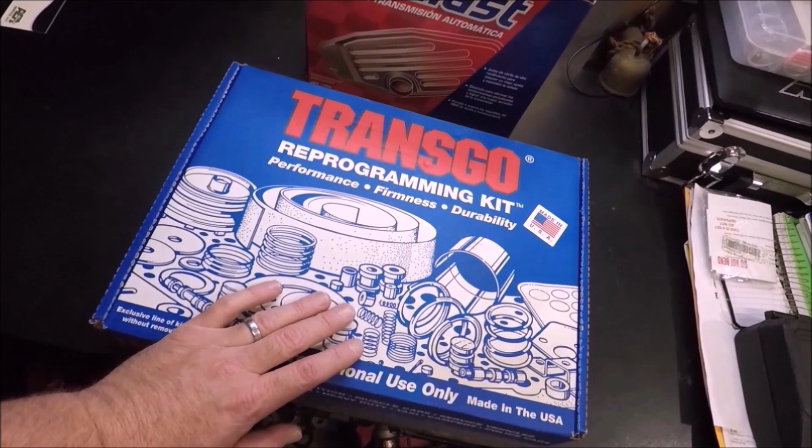The main thing we're going for here is we're trying to get rid of that sloppy shift that's costing us probably a half a second on our ETs. So that being said, we're going to open the box. So first up, we got our instructions here, page by page. I'm going to talk to you about that in just a minute. A cork gasket, which we're most likely not going to use. Then we have all our parts here.

Now, parts that apply to different sections of the transmission are in their own bags. I kind of like the way Transgo did that. They didn't just throw everything together in one bag. So if there's something you don't want to do, for instance, I believe this is the manual valve, where it gives you full manual control, you don't have to do that. You can just leave that stuff in the bag. These are the parts for your servo on the side of the transmission. That's one issue we're actually going to have.

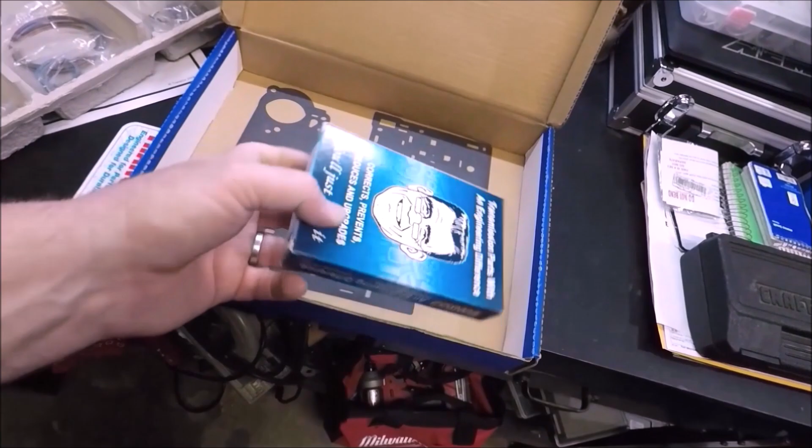If you lift this out, got your nice little Transgo sticker here, valve body gaskets, and you have your clutch spring kit. Now, in order to install this, you actually have to take the transmission apart. Since we are not removing the transmission from the vehicle, we are not going to be able to install these. Not a big deal. This is actually an optional piece.

With that being said, in my case, we have another issue, and that is the servo on the side of the transmission. Guys, I have been under the car. I'm going to get a better look at it once I get under there. But from what I'm seeing and from everything I have read online, it is pretty much impossible to get the servo out of the side of this C5 to install the shims and this helper spring in the servo without either removing the transmission from the vehicle or at bare minimum dropping the rear end to allow the transmission to come down enough to be able to pull this out the side.

So it seems to be pretty common practice in the C5 world to leave this part out for now. Now, I do want to say, for those of you who don't know, in the C5 Corvette, the transmission is mounted in the rear. So if you didn't know that, you may be thinking, hey man, why don't you just lower the cross member, drop the back of the transmission, get that servo out. It is not that easy in a C5, guys.

You actually have to take the whole rear cradle, the rear end, everything has to drop to get the transmission in and out. You have to deal with the torque tube that runs all the way to the front of the car. It is a pain in the rear, and that's why I'm choosing to not do anything to the servo on the side of the transmission until a later date when we have to take the transmission out of the car anyway.

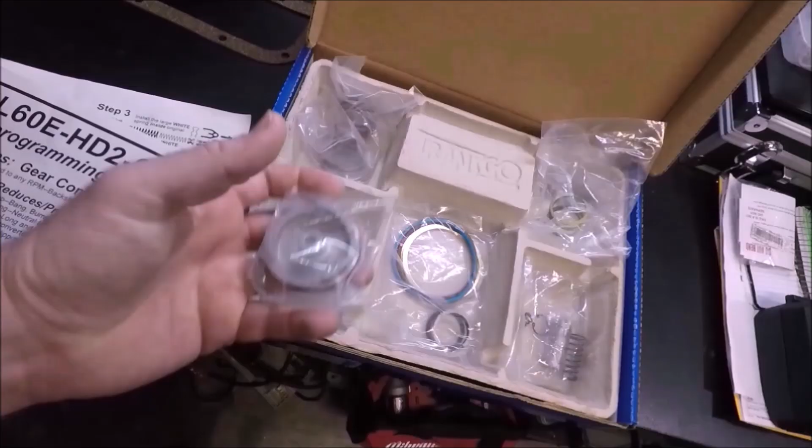At that point, we'll probably do a lot more than that, because while the transmission's out, it really doesn't make any sense to me not to upgrade some other internal parts such as the sun shell and maybe a few other things. So one other thing that I did buy is this accumulator piston online. I bought an aluminum one. I know some of these transmissions use a plastic accumulator piston, so they recommend when you're doing this kit that you go ahead and upgrade to the aluminum.

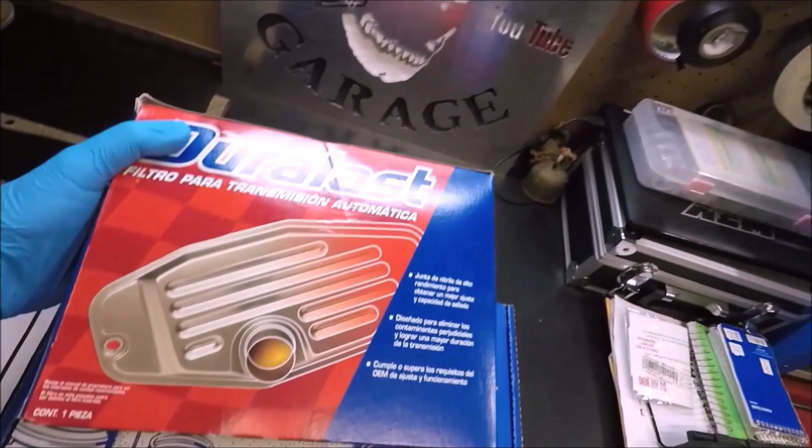One last thing before we drain the transmission fluid, I do want to make a note of this before we even start the video. I got this filter. They had this filter listed for the C5 Corvette. This filter to me looks like the deep pan 4L60 filter, and I do not think it's going to work with the C5 transmission pan. We'll find out. If it does not work, we will address that later in the video.

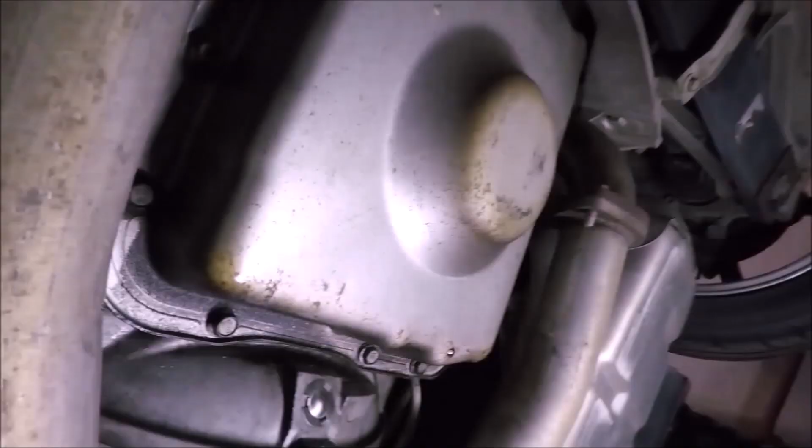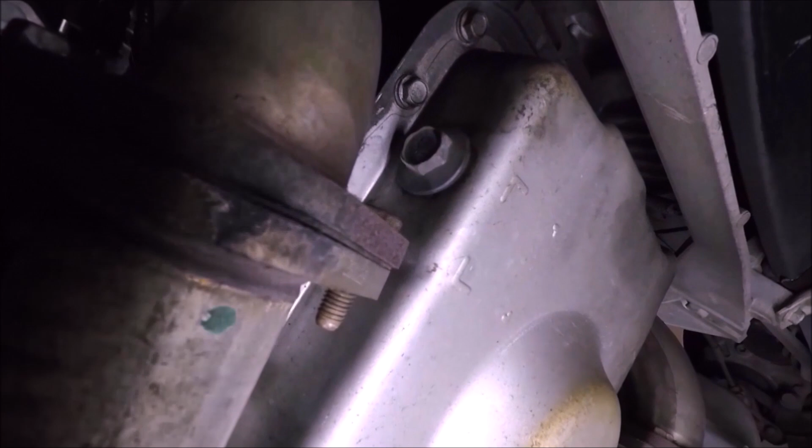We are under the car, and there are actually two different procedures I want to address as far as draining the oil. Now, if you are working on a C5 like I am, then over here on the driver's side, the back of the pan, you will find a drain plug. This is not just a drain plug, guys. This is a drain and fill plug. This is the only way you have to get transmission fluid in or out of the transmission on a C5. There's no dipstick. I will go over the fill procedure later, but for now, the drain procedure is we put a drain pan under it and we pull this plug.

If the vehicle you're working on does not have a drain plug, such as most trucks, you're going to have to go around and loosen the bolts either at the front or the back of the pan. Get a very large drain pan to cover a large surface area, or you will make a mess. And once you get all the bolts out except for maybe the back row, you're going to start loosening that back row. Pry the front of the pan loose, or you can choose to loosen the front row, pry the back of the pan loose, and you're going to have to let the pan drain a little bit that way.

Once it drains down enough to where you think you can handle the pan without dumping transmission fluid all over yourself, then you're going to hold the pan while you take the last remaining bolts out, and you're going to slowly lower the pan down. Now, again, I don't have to deal with that because we have a drain plug. So I'm going to get that taken loose, let all the fluid drain out.

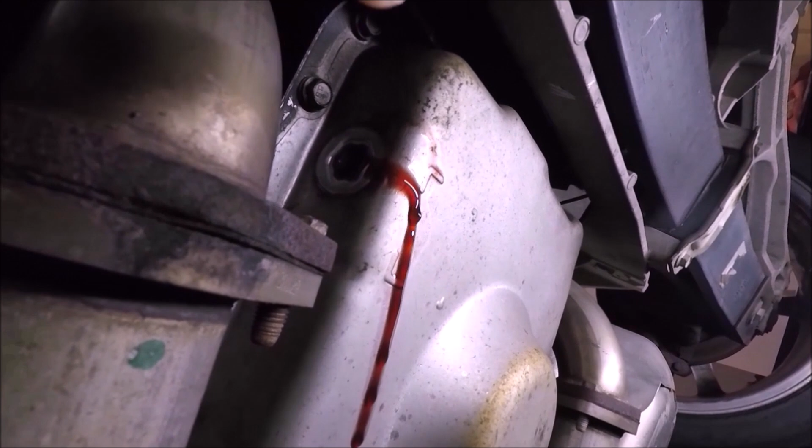So the fluid is almost finished draining. So the next thing I'm going to do, I'm going to put the plug back in to stop the drain. And I'm going to take loose 16 13 millimeter bolts around the outside of the pan and drop it. And I'm a cheater, so I'm going to use Mr. Milwaukee. All right, down to one bolt. I'm going to take that bolt loose and hold tension on the pan and lower it down as I take the bolt out.

Now, just a word of advice, make sure you leave your drain pan underneath the transmission. Guys, this thing could literally drip for like 4 days and would still be dripping. Just take my word for it. When you think it's done dripping, it's not done dripping. If you wipe it off, it's still not done dripping. So just leave your pan under here,

and we're going to take our pan off the bottom of the transmission. We're going to set it right here, and as we start taking parts off, we're just going to set them in the pan for now. That'll give us a convenient way to carry them over to the workbench later.

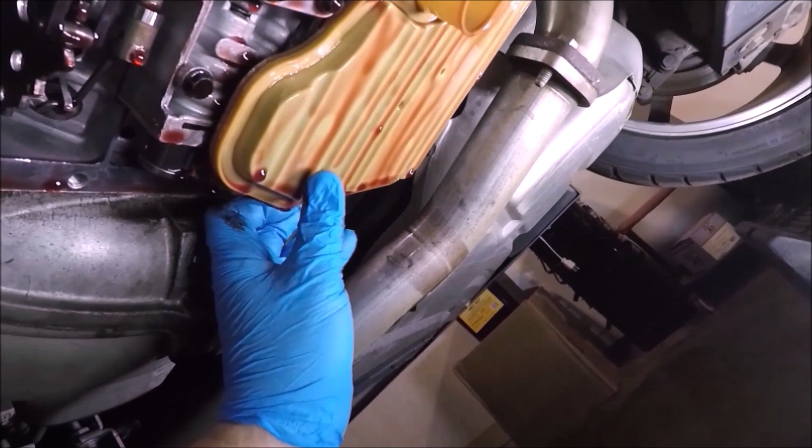So I'm just going to start with the transmission filter. We're just going to kind of pull down on it towards the front of the transmission. A little side-to-side movement as you pull down, and it should pop free. Go ahead and drain it into our drain pan here. And we'll go ahead and set it in the transmission pan.

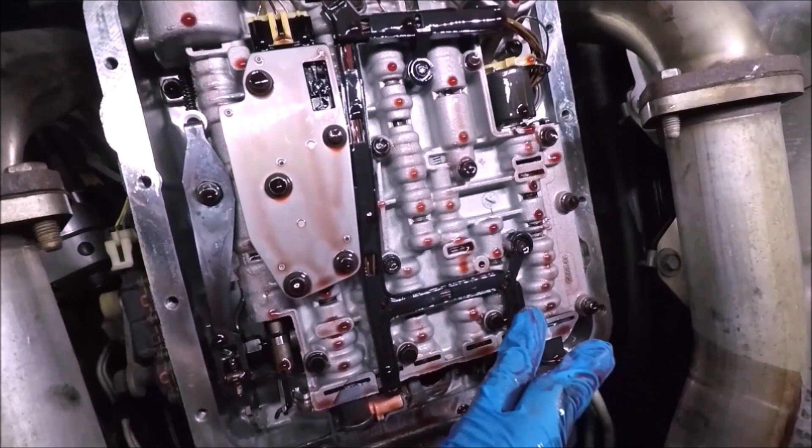The next thing I'm going to recommend doing is taking your cell phone and taking a picture of where everything plugs in here, guys. Just in case you get kind of confused later, you can just come over here, take your cell phone, take a picture, good to go for later. You'll be able to refer back to that picture because we're fixing to unplug all these electrical connectors.

So after you've taken your picture, you want to start unplugging your connectors. Be very careful, guys. Some of these connectors could be brittle and they will break. If they break, you're going to have no choice but to replace the entire harness. But just go ahead, go through here, unplug all these electrical connectors. Then we're going to pull this little pin out that retains this solenoid. Try not to have it go flying across the room.

We're going to pull this solenoid out to give us access to the two bolts that are holding in the TCC solenoid. We're going to take the two bolts loose from the TCC solenoid with a 10mm socket, wiggle it out while pulling down.

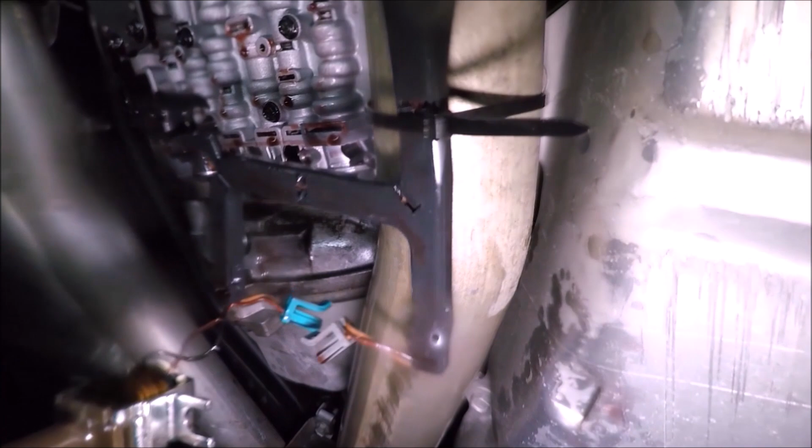You're going to pop the harness loose from all its attachment points and drape it over to the side out of your way. At that point, you're going to want to move your drain pan over underneath this to keep it from dripping everywhere. Now in my case, no matter where I let it dangle, it was still going to be in my way when I start removing the valve body. So I just went ahead and zip tied it to the exhaust over here.

Now the next thing I'm going to do, using the 10mm again, I'm going to remove these 3 bolts here and lower down the second accumulator. There are a series of springs and pistons behind here, so you want to be careful as you're lowering this down, you don't drop any of that into the transmission fluid.

Remember what I said the other day about how I do all the work, the filming, the editing, all by myself? Well, yeah, sometimes it's a pain in the butt, guys.

But you can look in here and you can see the second accumulator piston, and it looks like it is in fact plastic, so I'm glad I bought that replacement. We're just going to take this guy, set it in the transmission pan with all our other goodies. And the next thing I'm going to do is remove these 3 10mm bolts and these 2 8mm bolts and drop this pressure manifold. And we're going to put them in the pan.

Now we're going to take out the 13mm bolt for our shift detent spring, remove that, and we're going to remove all the 10mm screws from the valve body except this one right in the middle. We're going to leave that in there to hold it up. I'm now going to remove these 3 8mm screws here. Once I do that, I'm going to hold on to this while I remove this center bolt and lower the

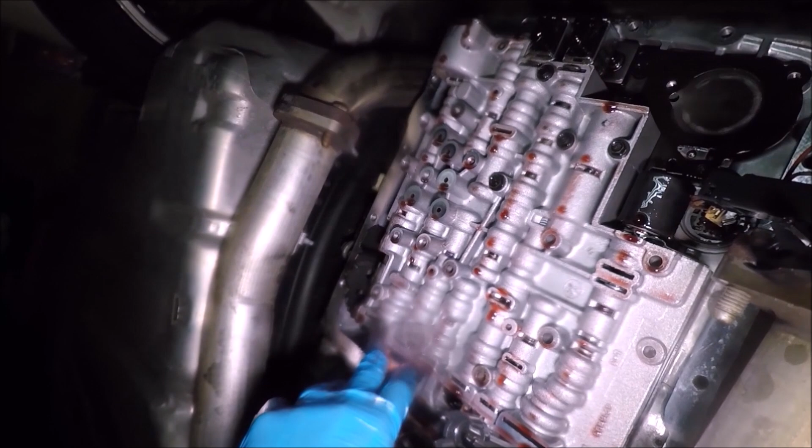whole valve body down. Now I would love to do one of those cool little videos where I show myself slowly lowering it down in a dramatic fashion, but like I said, guys, I'm out here all by myself. So I'm just telling you what I'm going to do. I'm going to have to do it off camera because, well, quite frankly, I don't have 3 hands.

What I can warn you about is upon loosening that middle screw ever so slightly, this thing started draining, dumping fluid everywhere. So be on the lookout for that, guys. As a matter of fact, I think I'm going to let this drain a few minutes and I'm going to go grab me something to drink.

I managed to get the valve body off. One little thing I wanted to let you guys know. Over here you have your shift linkage, guys. It goes to your manual shift valve, and it's kind of like a little Z shape. What you have to do is, once you start to lower the valve body, you have to bring it over toward the passenger side about 1 inch, and then this guy will slip right out of the manual valve, and you'll be able to lower the valve body down after that. And just like everything else, we just put it in the transmission pan here.

The only thing we have left is to take these 3 8mm bolts out to remove that plate. That is currently the only thing holding our separator plate up. Now keep in mind, guys, there is a check ball. Most of the check balls are in the valve body, but there is a check ball above this plate right up, oh, there it is, right here. So when you're lowering this down, you don't want to lose that guy. I'm going to get those 3 bolts out, set this in the pan along with the check ball that I'm not going to freaking lose, and then I'll take everything over to the bench and I'll see you guys then.

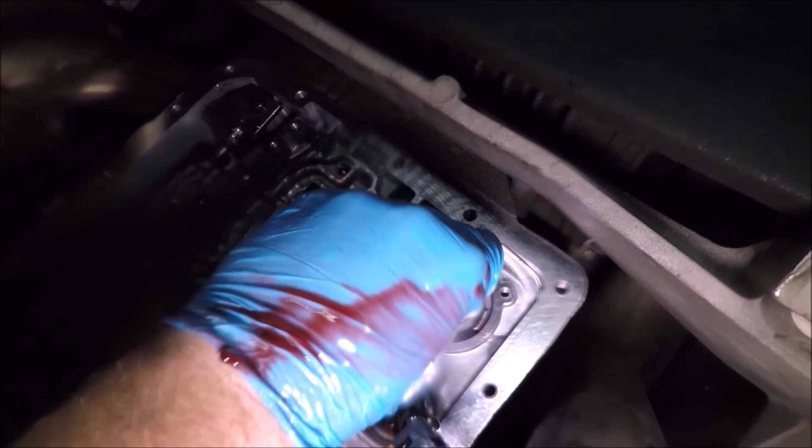Almost forgot. We've got this one last accumulator piston here that needs to come out, and it looks like it's going to make a mess, but we're going to take the pin that's through the center and we're just going to wiggle it. I'm going to use 2 hands for this, guys, but just keep wiggling. You can see it's coming down the bore, but we need to get that guy out of there. So I'm going to set the camera down, get that out of there, and then I will meet you guys at the bench. So here on the bench, we have all our goodies.

Now, I'm ashamed to say I'm going to have to take a few minutes to clean this GoPro because it got a bath in transmission fluid. Not good. But I do recommend cleaning off some of these parts with brake clean. You don't have to get real intricate with it unless you've got a lot of grit and grime. You can kind of tell I've got a thin layer of clutch materials, but nothing bad really. This transmission, judging from the pan and everything, looks like it's in pretty good shape.

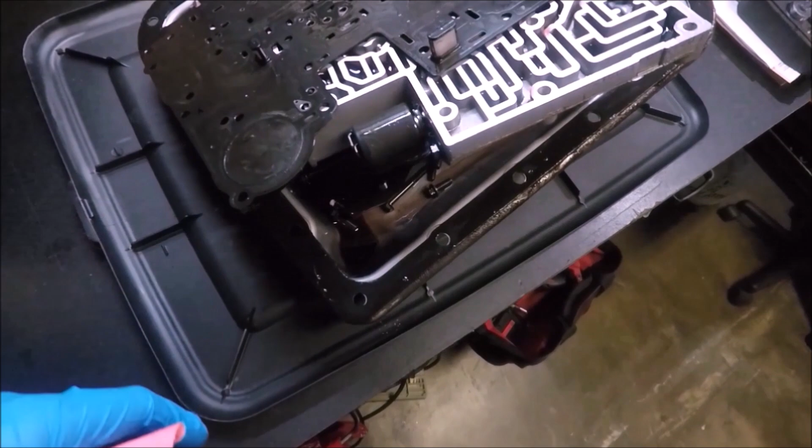So I'm basically just going to clean off my separator plate here, take my little filters out. We actually have a modification we have to do to this one. I'm just going to spray off the valve body a little bit to clean it up, clean up all my other little parts here, clean the pan up real good. And honestly, guys, I'm going to let the transmission drain overnight so that when I go to put this back together, I'm not getting fluid dripped all over, or at least not getting it dumped on me.

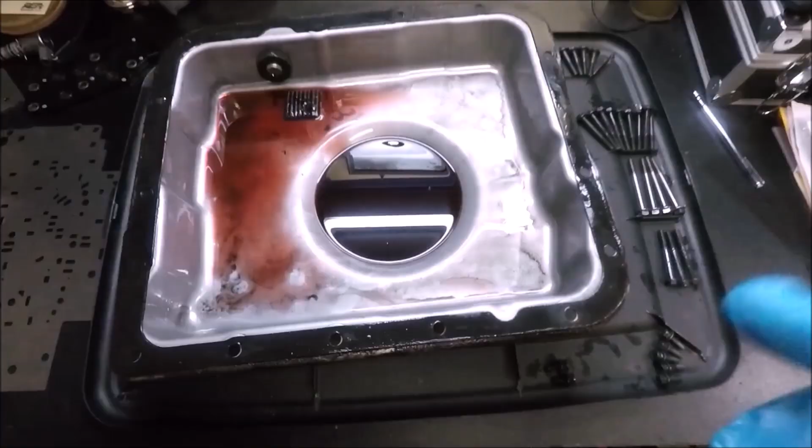Now, I was just organizing all my bolts here, just wiping them off. And I wanted to show you guys this before I actually dump this pan. There is very minimal clutch material. Of course, we have some around the magnet here, as you usually will, but overall, oh, sorry guys, that came off the magnet, for a transmission with 78,000 miles on it, and one that I personally have beat the crap out of, I think this thing's in pretty good shape. The fluid was even nice and red, so I think our transmission's in good shape, and we're good to go to put the shift kit in.

Alright guys, so here we are. All our parts are cleaned. We got everything kind of laid out here, ready to go. We got our pan all cleaned up, and we are going to start the modifications now. I'm going to go ahead, do everything that I can up here on the bench first, even though it might be slightly out of order from the instructions, and then we'll move under the car where you're probably not going to be able to see what the hell I'm doing because I don't have anybody to hold the camera. But I'm going to give it my best shot, guys.

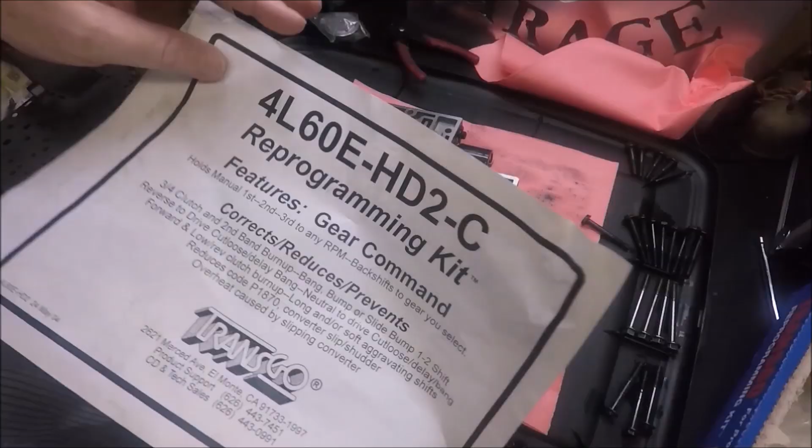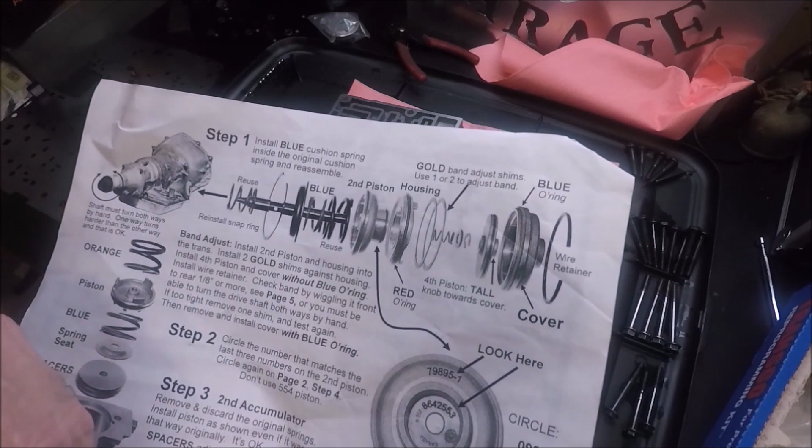So we go to page 1, and of course the first thing it tells you to do is the band adjustment with the servo on the side of the transmission here. Like I said earlier in the video, guys, I don't think I can get this out. So here's what I'm going to do. I'm going to skip that for now. For now, I'll just let you kind of see the instructions. Basically, all you're doing is pulling the servo out of the side of the transmission there.

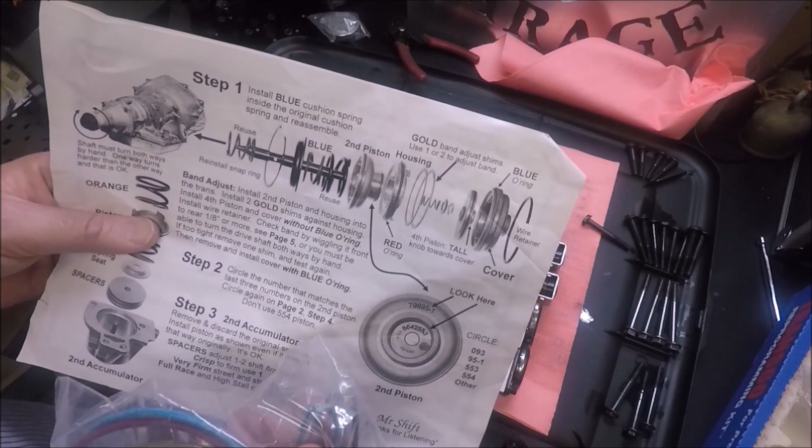And in this package, you've got this blue spring. It's going to go inside of the spring right here that's already in there. And then you've got these shims. You can add these shims here to adjust the band to either make it tighter or looser. Most people that I have read about say don't even use the shims. Most people, all they do is put this spring in, put it all back together. Again, guys, that's all there is to it. You're adding a spring. Most people leave out the shims, and the 2 O-rings are just gaskets to replace the O-ring gaskets that you already have.

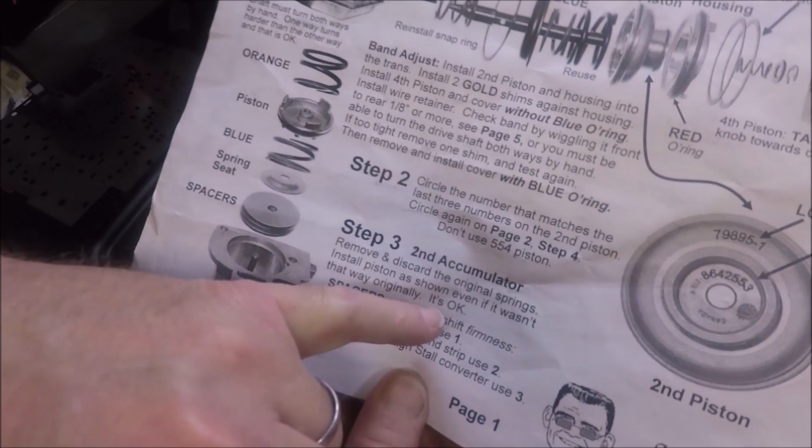So moving on, we have our second accumulator. That's this guy right here. What it says to do is remove and discard the original springs, install the piston as shown. Even if it wasn't installed that way originally, it's okay. And obviously mine is not installed that way originally. It's actually flipped upside down. And again, we're getting rid of the plastic one and replacing it with this metal one.

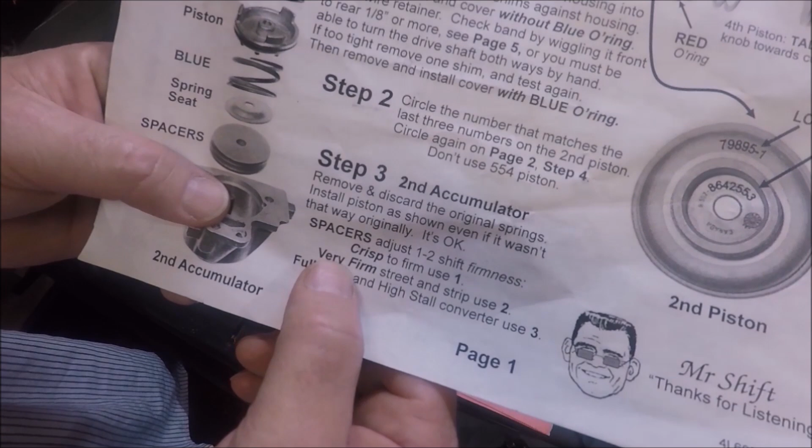When it comes to these spacers here, it says this is to adjust the 1-2 shift firmness. One spacer is supposed to be a crisp shift. 2 spacers is supposed to be very firm for street and strip, and 3 is full race with high stall converters. Here's the deal, guys. You're actually doing a lot of different things to adjust the feel of these shifts, okay? So later on, we're going to drill our separator plate. When we do that, basically, if you put in 3 spacers and open up the holes to full race, this thing's going to hit hard as hell.

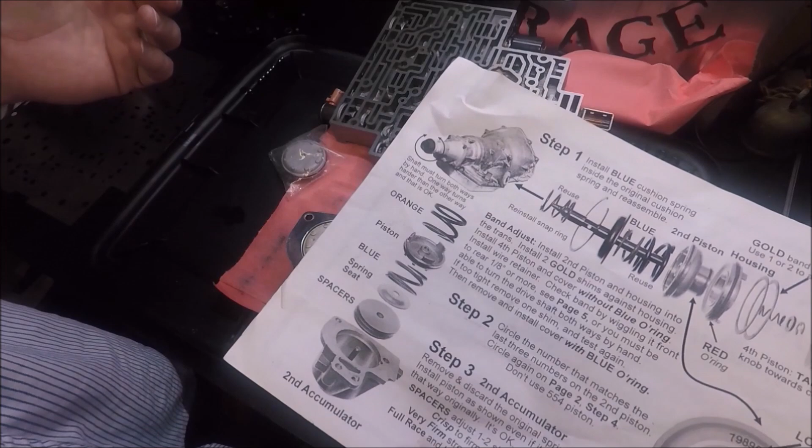I'm going to actually, when I do the holes, well, you'll see. But for now, I'm going to go with 1 spacer when I put this together. I'm hoping it won't be too harsh, but if it is, the truth is, guys, it's not a huge pain to drop this pan. You can actually take this off without removing the valve body and everything. So it really wouldn't be a big deal to have to drop the pan again if this is too firm of a shift and take that spacer out. So I'm going to start off with the spacer. I'm going to show you how I'm putting that together now according to these instructions.

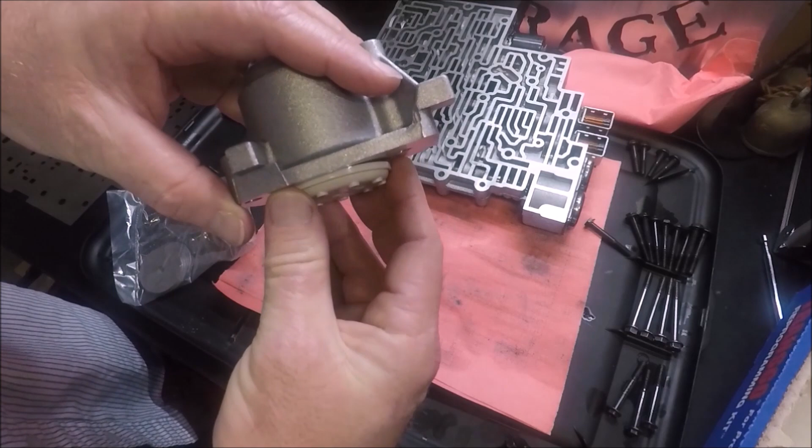So we're using this baggie. It's got the spacers, the spring seat, a red spring, and a blue spring. We're going to take our 1-2 accumulator. I'm getting rid of this. And it says to discard the old springs. According to the instructions, we're going to go with 1 spacer. Put our spring seat in with the beveled edge up. Then we've got our blue spring. Then we've got our new piston here, and originally it was like this, but according to the instructions, we're flipping it over and installing it like this.

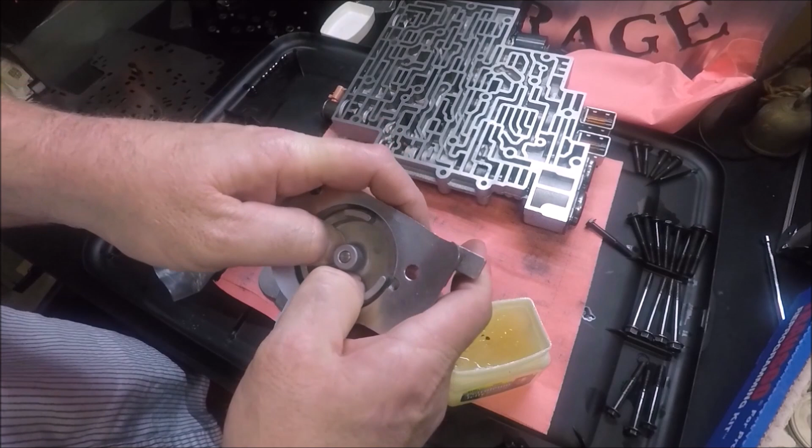Actually going to take some petroleum jelly, Vaseline, and smear it around this seal. I don't know if I'm going to edit it or not, but I actually just tried to put it in with no lubrication, and it didn't want to go in. So I'm going to lubricate the edge here, and then hopefully she's going to pop in. A little bit of pressure. There it goes. All right. So now we're popped in. Make sure it's not bound up. Yes, we're good. Take our red spring, put it right on top, and we're going to set this guy aside.

Now, moving right along. Oh, yes. Going over here to valve body. So we'll bring him over in the picture.

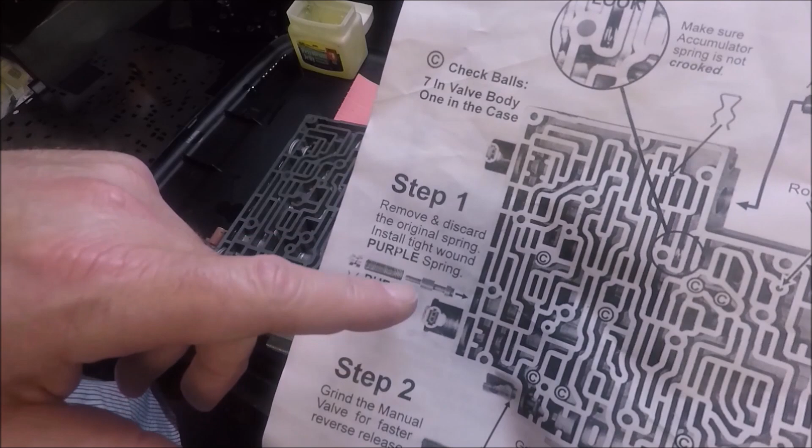And the first thing we're going to do, step 1, it says remove and discard the original spring. Install tight wound purple spring. Appears to be them. And here's our tight wound purple spring. Twist this solenoid up to get out of the way. And we've got a little spring clip here that we need to pull out.

And I don't know if this is going to pop out. It feels like it is spring loaded. So I'm just going to keep some tension on that with my thumb. And we're going to pull this little spring clip out here, and try to have it not go flying across the room. So there's a spring clip. I'm going to set it over here. I'm going to slowly let this guy come out.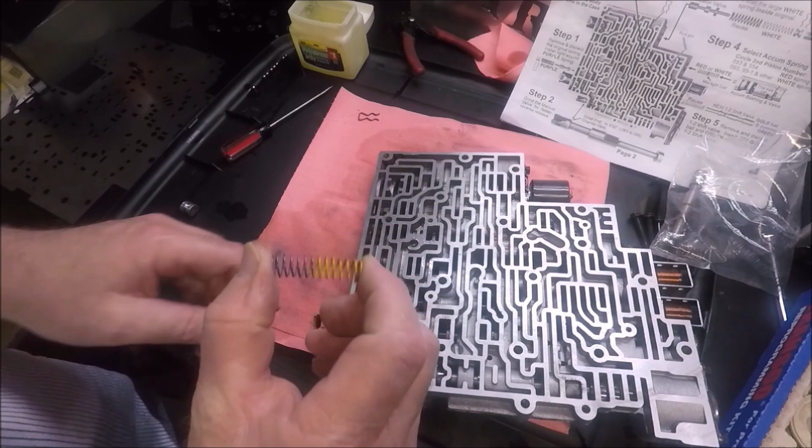And we can see this spring, which is obviously not wound anywhere near as tight as that one. So it came out like that. And then there is a valve in there. I'm just going to check to see that that valve moves freely, and it is. It's moving freely, guys. So there's really no need for me to remove that valve completely.

All I need to do is open my bag and get my purple spring out. We're just going to put our purple spring back down in here. We're going to put our plug back in the end, and we're going to put our clip back in.

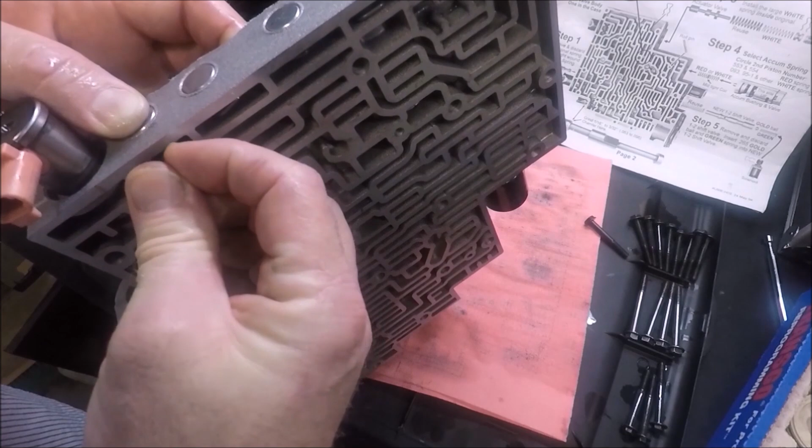Step 2, it says grind manual valve for faster reverse release. Totally not worried about that, guys. I would just skip this step. It's not a big deal, and I'm not going to do it. I don't care about the reverse release thing. But basically, all you're going to do, if you choose to do this step,

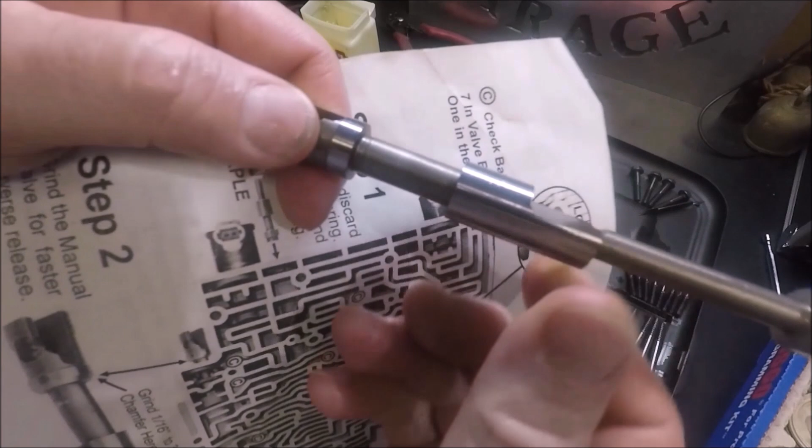you're going to take your manual valve here. You're going to take it over to a grinder, and you're just going to bevel this edge right here. You're just going to bevel this edge, knock the edge off, and as you can see here, bevel that edge all the way around. Like I said, I'm not worried about that. Totally not going to do that.

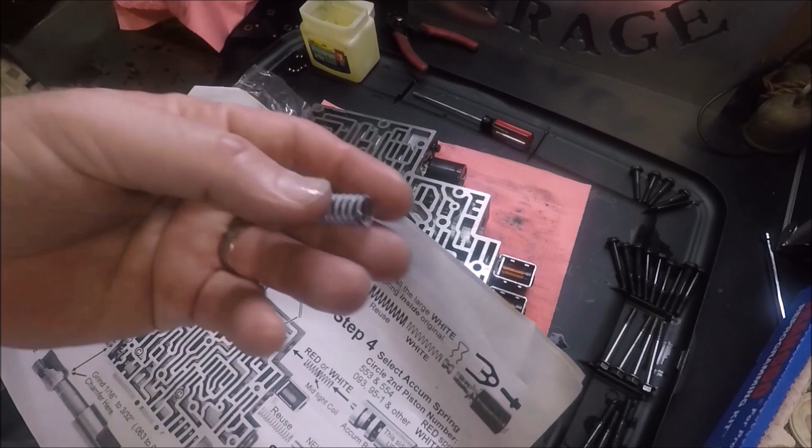Step 3 is we remove this solenoid, and all we're going to do is take our large white spring here. We're going to take our large white spring and we're going to put it inside of the spring that's already in there. I believe we're going to need an 8mm to pull this off.

Remove our little tension spring there. Going to carefully pull our solenoid out. So you're going to have another clip to deal with. This clip is pretty deep in here, guys, but if you flip the valve body over, you should be able to take a small screwdriver and you can push down on the clip, kind of work it out. At least that's what I'm going to try.

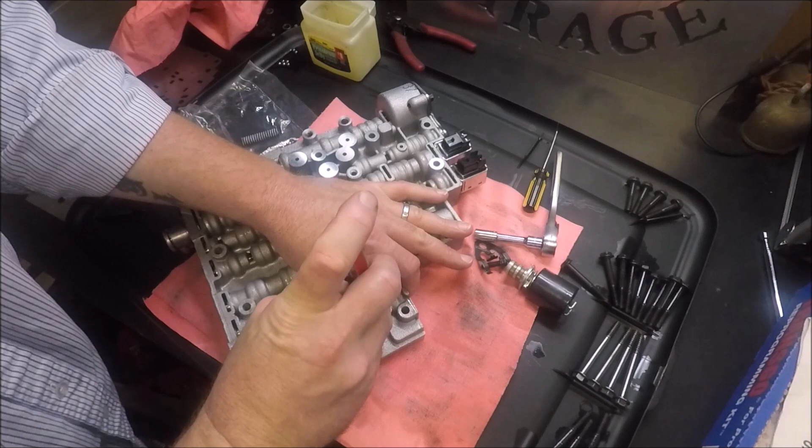Yeah, and I think it is just about out now. So we're going to flip it back over. Yeah, you can see it's about out. So I'm going to hold my finger over the hole here, so hopefully nothing shoots out, and finish pulling the clip. Oh, and I'm glad I had my finger over that because stuff was definitely shooting out. Just keep working it till the cap starts coming out the end there. And finish pulling it out.

There we go. Now we're going to take our large white spring and we're going to put it in there in the middle of the spring that's already in there. Jiggle it a little bit. Make sure it's seated. We'll stick our cap back in. Push it in with a screwdriver and get our clip back in there.

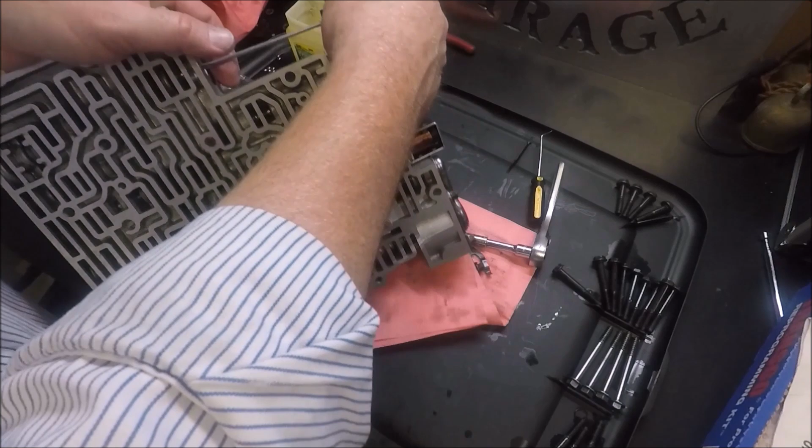If you count right here, the cracks, you got 1, 2, 3, 4, and the 4th crack is where that clip needs to go. So you've actually got to push this pretty hard. I'm going to try to do it on camera here. It's going to take 4 hands for me to do it.

There we go. Yeah, there is a lot of tension on that. Now, there we go. It snapped in. Clip snapped in. Now I can put my solenoid in. It should slide right in there. Yeah, there we go. We're good now. Put our little clip back on and tighten her down.

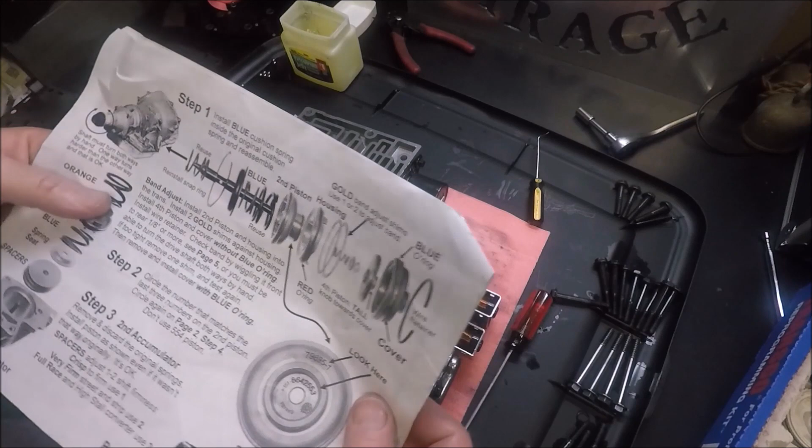That drama out of the way, we move on to step 4. All right, a little explanation here, guys. If you go all the way back to right here where you're doing the band adjustment, the part that we skipped, step 1 with the servo, it tells you in here to look at the part number on the case of your servo here, your second servo. And according to the part number, it's like the last 3 digits of the part number. That's going to tell you what spring to use in the next step.

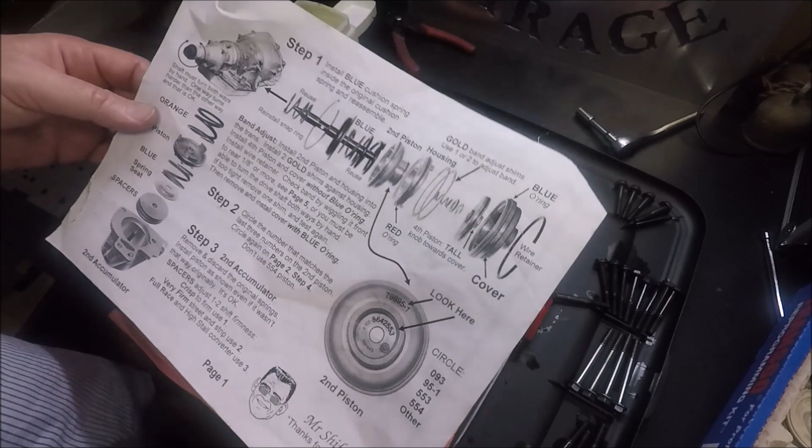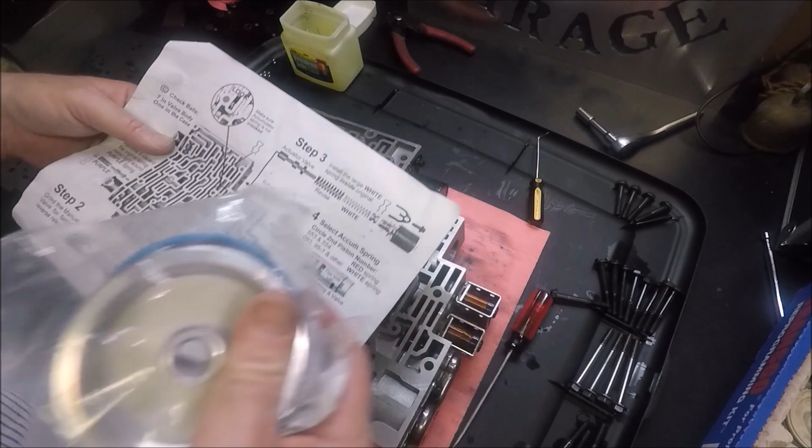What I'm telling you to do is invest $15 more before you buy this kit, and just go ahead and get you a Corvette servo, guys. It's an upgrade. They're literally like $15 on eBay, and this is what you get for $15. I actually bought this. I'm planning on doing an install of this in the Avalanche in the future. You guys will see that. But as long as you have the Corvette servo, you don't have to worry about it. If you've got a Corvette servo, you're going to use the white spring here. So this came out of a Corvette. Obviously, we have a Corvette servo, so we're going to use the white spring in our next step.

And the next step is to pull the accumulator piston out of this bore right here. Now to do that, there is a roll pin right here. I hope you guys can see that. There's a roll pin right here in this little hole. We're going to have to knock that out. You can see the end of it there. So all we're going to do is take a screwdriver and push it up this way.

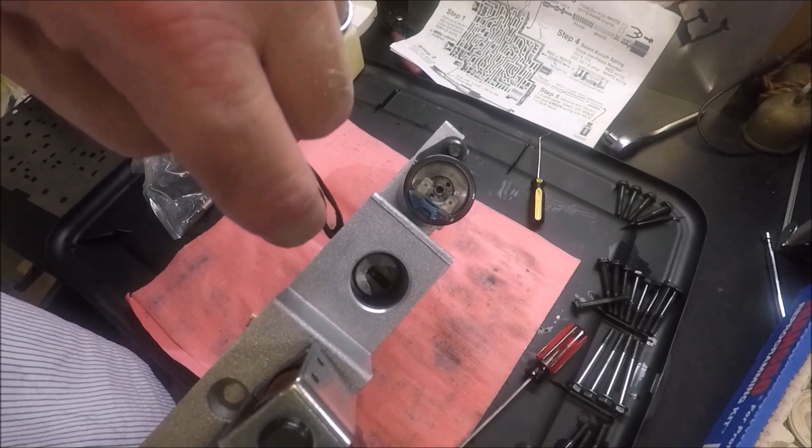And stab ourselves in the thumb. Then we're going to hold a finger in here so stuff doesn't go flying, which it didn't anyway. We're going to pull our roll pin out, set it over here, and we're going to pull our accumulator out. And just like we did the last one, when I say puncture your thumb, I wasn't kidding, guys. There you go. That roll pin just got me in the thumb.

We're going to do the same thing we did on our last one here. We're going to use our screwdriver to work the valves in here. If you have a hook like this, we'll see if that works. May be able to get in there and grab something and pull it out. Yeah, there we go. So we're going to slide him right out. He's a little gunked up, so I think I'm actually going to clean this before I put it back in.

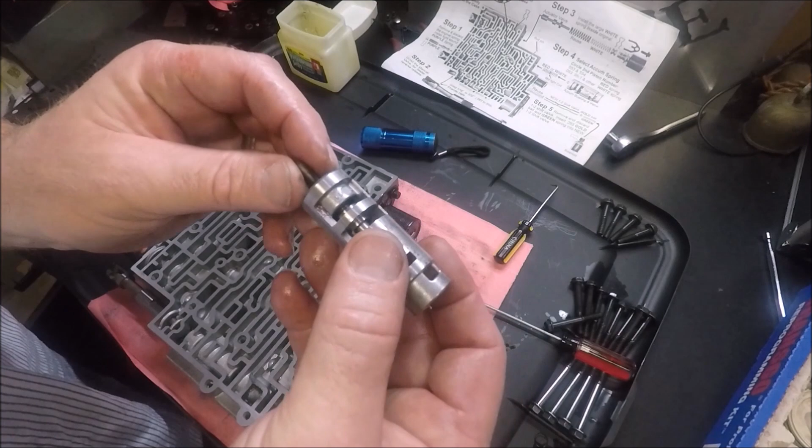I'm not sure. On most of these, if you're supposed to discard it, it says to discard it. This one doesn't say discard. But it doesn't even show it on the picture, guys. So I'm kind of thinking I'm supposed to discard it, so I'm going to set it over here. And this guy just goes on the end here. Then the whole valve goes back in, and we shove our roll pin in. I really hope I'm not supposed to be putting this in on top of the one that's already in there. Surely not. That would be a lot of pressure.

There's a little bore in there, guys, you can try to get that spring to drop into. Actually, I don't trust it. So what I'm going to do, I'm going to go ahead and clean these parts real quick, and then I'll come back, I'll set the spring on here, and then I'll just slide it in. You've got to get this valve in just the right position, because the roll pin has to go through the hole in it, guys.

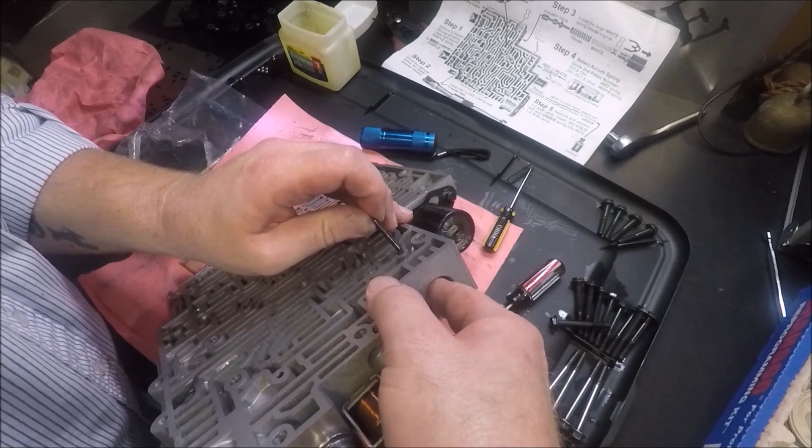There we go. And that shouldn't take much force. We'll just kind of tap on it with the end of our little screwdriver. That's flush. Now the instructions say to look right down through here, and that's the spring we just put in, and make sure that the spring is not crooked or in a bind.

And I can see the spring is not in a bind. So moving right along to step 5. Step 5 is we are replacing the 1-2 shift valve. I am not 100% certain on this, so feel free to chime in the comments if you know better than me, which you probably do.

But I believe this new shift valve is what gives you the full manual capability, the ability to downshift in any gear. You know, it still retains automatic capability, guys, but it'll give you the ability to instantly shift up or down to any gear. So if you don't want that, if you don't care about that, you can probably just skip this whole step. Again, I'm not 100% sure though.

Right here is our shift solenoid. We're going to flip this up on its end, pull another one of our famous pins. So we're going to pull our shift solenoid out here, set it over to the side, and we're going to remove our 1-2 shift valve. Our kit actually comes with a new shift valve. Just to hold it up for comparison there, you can kind of see the difference in the two.

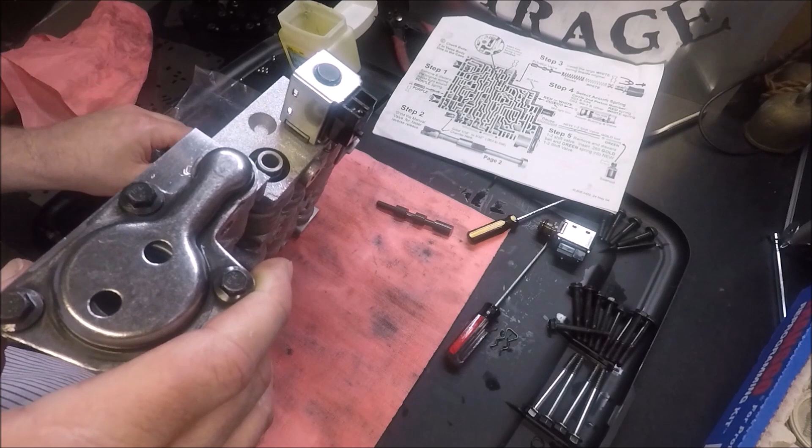So at this point, I'm going to set it up. I'm going to drop my check ball in the end of the shift valve there. I'm going to take the green spring, which honestly looks more yellow, but I'm sure it's the right spring because it was in the same bag. I'm going to drop it in there as well. We're going to take our shift solenoid, stick it back in there, and we're going to put our little clip back in. And boom, just like that. I believe that is what gives us the full manual control.

Moving on to the next page. Now guys, we will be using the page we were just on as a reference. This page actually has the locations of all the check balls on the valve body side here. So after I finish the next step, once we go to put the separator plate on, we'll refer back to this page and make sure we take all our check balls and put them in the appropriate holes.

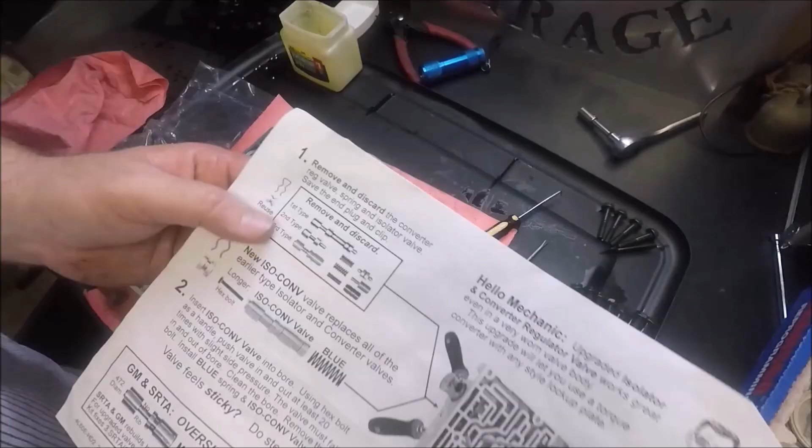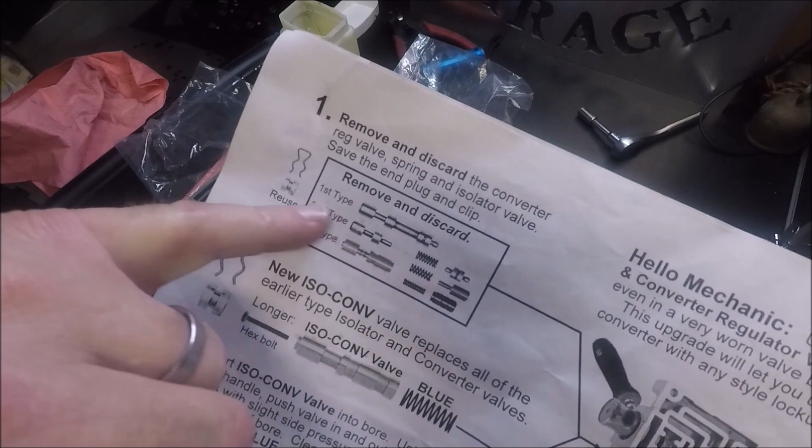Now, on to this page, we are replacing the ISO-CONV valve. I'm just going to read through the instructions. It says, remove and discard the converter regulator valve, spring and isolator valve. That's all these things, guys, right here. There are 3 different types here, and it doesn't matter what type you have. You're going to discard all this, and we're going to be replacing it with this.

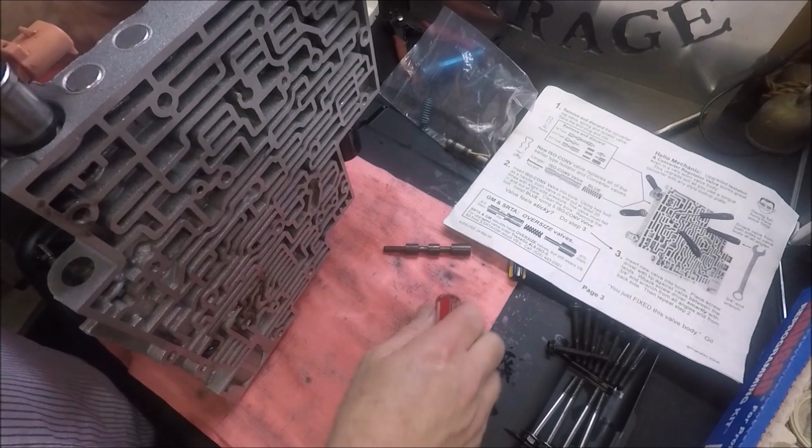We've got another one of our friends, Mr. Clip, here. So we're going to pull Mr. Clip. This will be the one that ends up going across the room, guys. Alright, looks like this one is going to be another one that we need to push off from the back side. So I'm going to hold my thumb over it and push that clip down. I'm going to have to edit this just so you guys don't have to watch me struggle. But I'll make it perfectly clear that I was struggling. Oh, this ain't too bad.

There we go. So we got him out, and we're going to do the same thing that we did with our other ones, where we take our screwdriver, pop our plug out here, and let's see, can we just shake it out? We should be able to. There we go. There's all the parts. No, there's more in there. We just want to look down in there, make sure there's nothing left.

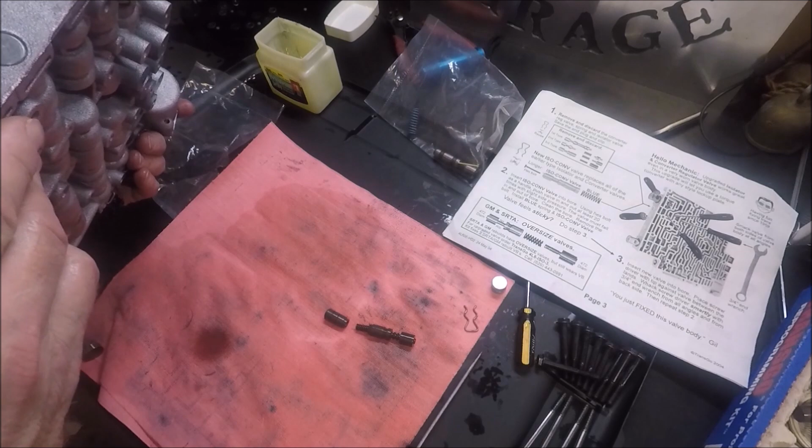It says to insert the new valve into the bore using a hex bolt as a handle, and it comes with the hex bolt in this bag here. Push the valve in and out at least 20 times with slight side pressure. The valve must fall in and out of the bore. Clean the bore, remove the bolt, install blue spring and Iso converter valve. So what they want us to do is basically ream the bore with the new valve. You could probably just go to town on this, guys.

So I'm just going to thread it into the end there. We're going to stick it in the bore. Wait, it just falls in already. It says to run it in and out at least 20 times with slight side pressure, but I'm telling you guys, it just falls in already, so I don't think we got a problem here. I'm going to go ahead, clean the bore out, and install this. We'll drop our blue spring in, we'll drop our new valve in. And you can see it does drop in just like it said. And we'll take our screw out here.

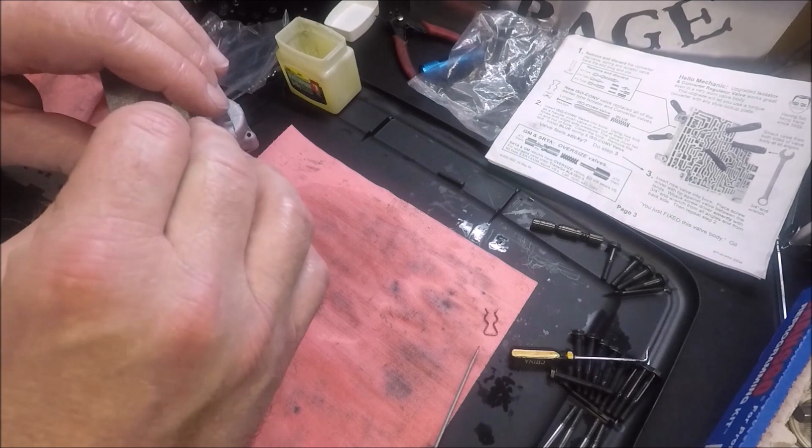Again, it dropped in. And we're going to take our plug, put our plug back in. And, oh, wrong side. Come over here and put our clip back in. And with that, it says you just fixed this valve body. So we are completely finished with the valve body, guys.

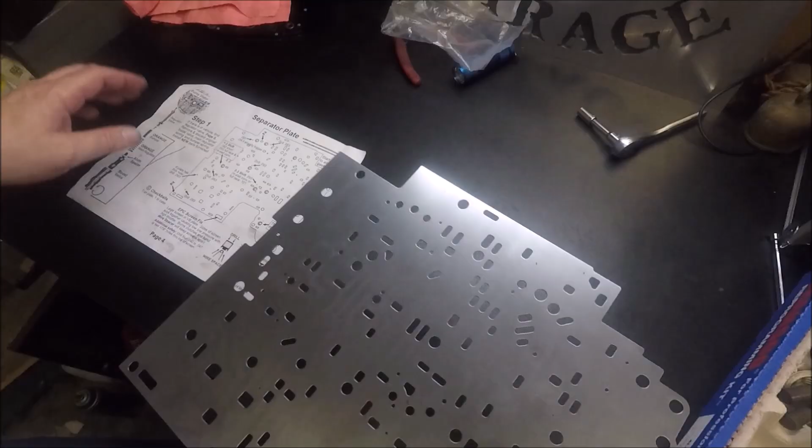We're moving on. The next thing we have to do is under the vehicle, and I told you earlier we're going to save the in-vehicle stuff for later. So we're going to move on now to drilling the separator plate. Now before we do this, I do want to make a note of something. You can see on some of these, you can tell where the check balls were at, guys, because you can see where they've kind of been hammering the plate.

Now this one doesn't really have a whole lot of wear. I mean, it doesn't look like the balls are about to bust through or anything. But you can buy a new plate pretty cheap from a transmission shop. So if you're worried about it, I would suggest just going and spending, you know, the $15 or whatever and buying the new plate. But if the holes don't look too bad, then you can just go ahead and roll with your old one.

That's actually my one complaint from this kit is, you know, when I used to use the B&M kits in the old days on the old Turbo 350s and stuff, they always came with a new separator plate. I kind of feel like for what you pay for this, it should come with a new separator plate too, but it doesn't, so just keep what I just said in mind.

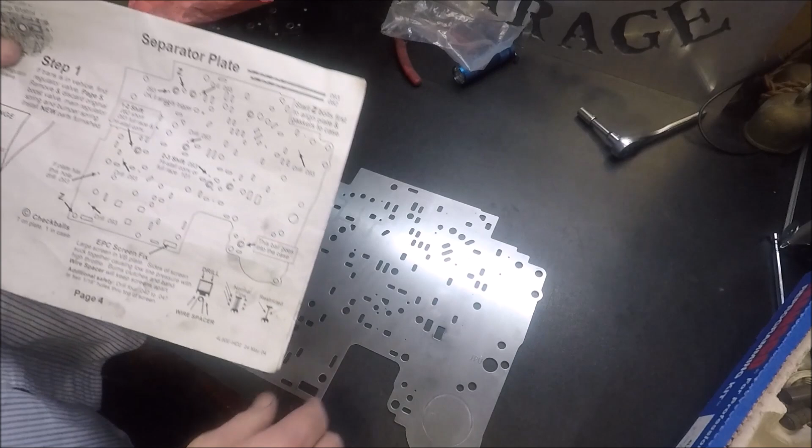Now, moving along, I am not going to walk you through every hole I drill, and that's because, well, quite frankly, you may decide to drill them differently than I. So basically, I'm going for the bottom level on everything, guys. I am just trying to tighten up the shifts. This is not a race car, regardless of what some of you may think. This is not a race car. I'm just trying to firm up the shifts. So I'm going to go on the low end on everything.

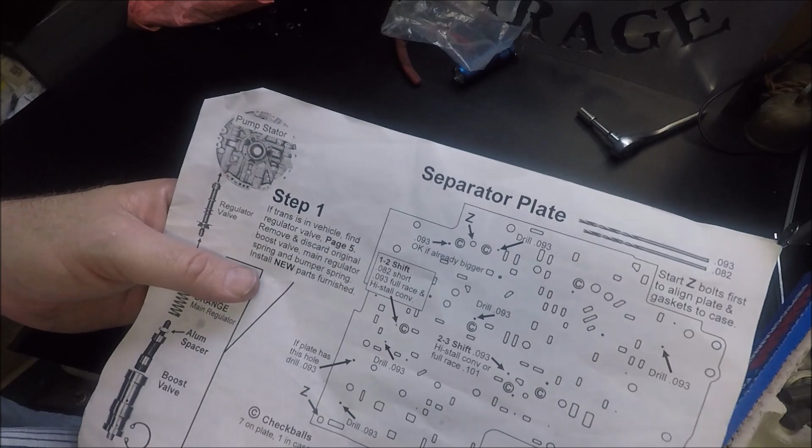Like, for instance, the 1-2 shift, this hole right here, it says for a short shift, drill it to 0.082. For full race and high stall, drill it to 0.093. Well, obviously, I don't have a high stall converter, and I'm not going for full race. So my 1-2 hole right here is going to get an 82 bit. They do provide you with an 82 and a 93 in the kit.

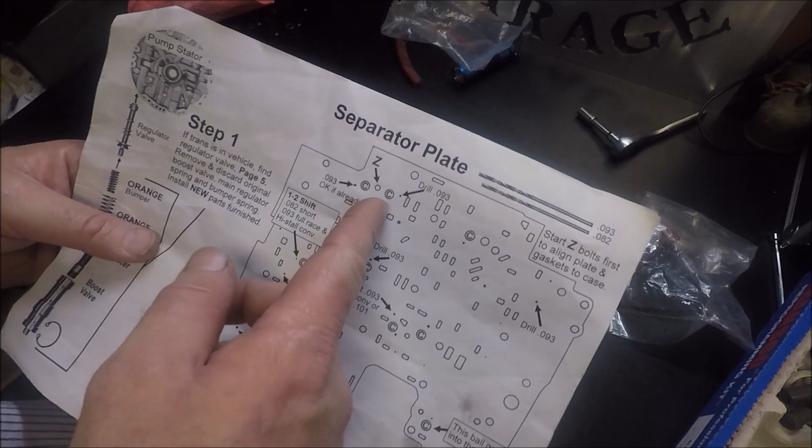Now, on some of these, it will tell you for full race to go all the way up to a 0.101. They do not provide that bit, guys. So on some of these holes that require a 0.101, if you really want to open them up, you're going to have to go buy that bit. That's not a problem for me. From the looks of this, it looks like I'm drilling all the holes to 0.093 except the 1-2 shift hole, and that one is going to 0.082. So I'm going to get on that.

The only tip I really have to offer you on this, guys, is clean your plate really well. You do not want to drill the wrong hole. So my suggestion is clean your plate really well, and then go through with a Sharpie and mark the holes that you're going to be drilling. And that way, you know, you don't screw up. So that's what I'm going to do right now. I'm going to make sure I'm on the correct holes, and I'm going to mark this plate, and then I'll come back and show you how I've marked it.

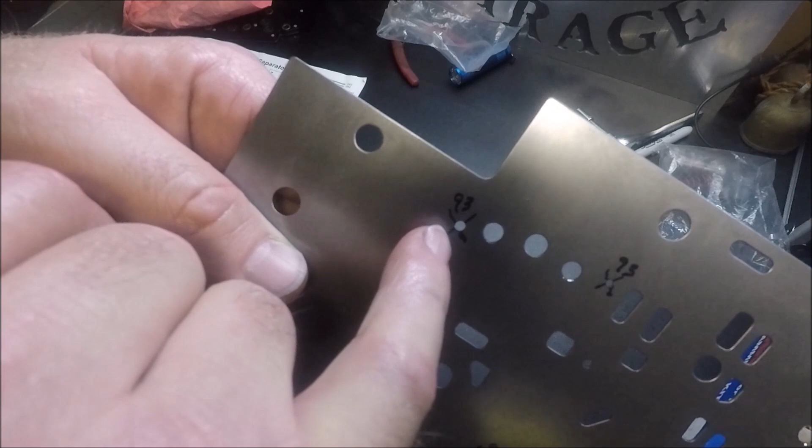You can see what I've done is I've gone through and I've marked my number next to all the holes, you know, 93, 93. And I do want to say some of these holes are actually already drilled out even larger. Like, that's probably 1.01 already. It's bigger than this 93.

And it says on the paper, if some of them are already larger, that's okay. But I definitely need to drill out my 2-3 here to a 93. And I definitely need to drill out my 1-2 shift here to a 82. So I'm going to go ahead and drill all these out, and I'll be right back.

Once you've drilled all your holes to the size you want, just take your drill bit and check. Make sure it goes in them easily, just slides in and out of the appropriate size hole. Then check, make sure you didn't raise any burrs. If you did, you're going to want to take a file or something and clean the burr off. You don't want to leave a burr in there.

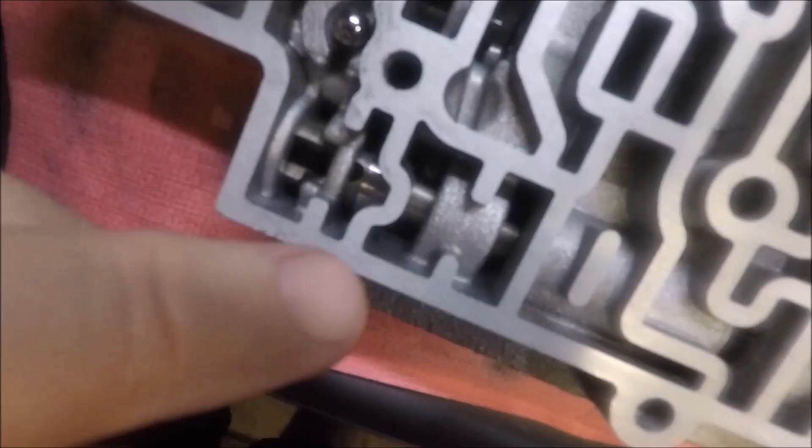All right, guys, so moving along, we're going to go ahead and put our check balls in now. As I stated earlier, there is a diagram here showing you the location of every check ball. But honestly, it's pretty easy to determine where they go. I'm going to pull one back out here. You can kind of see everywhere there is supposed to be a check ball, there's a little indent there. So it's pretty hard to get confused. We'll pull this out. You can see there's a little indent there. Same with this one. It's pretty obvious to see where they go.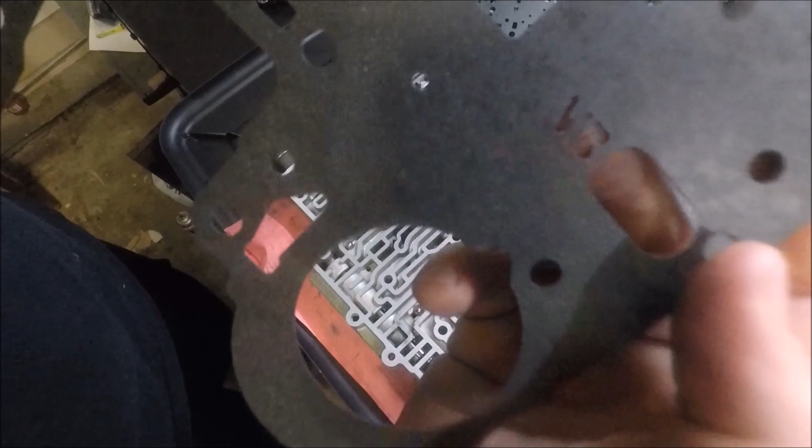It's time to move on to the gaskets. We have two gaskets here, guys. We have a gasket that says CA, which stands for case. And we have a gasket that says VB, that stands, of course, for valve body. So we're going to lay our valve body gasket right here on top of the valve body. Then we have our separator plate that's going to lay on top of that.

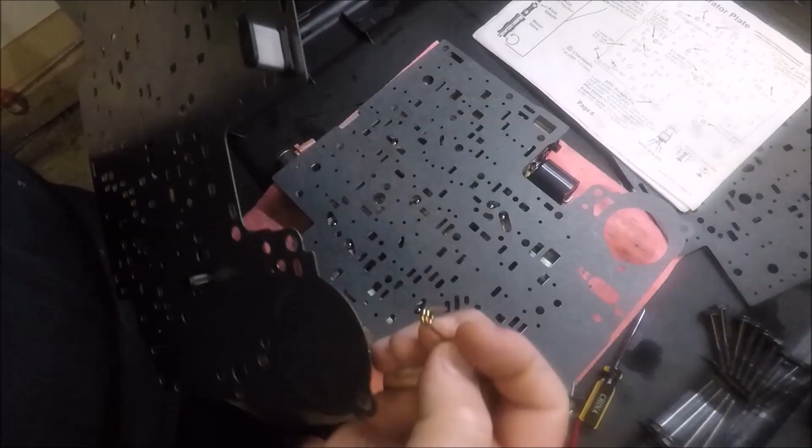Now, before we put the separator plate on, the instructions tell us to install this little wire spacer right here inside of our larger filter. This is to keep the filter from being sucked shut under pressure. So basically, we're just going to put that inside here, and we're going to lay our separator plate on here, and that should hold it in. There we go, just like that. Try to line up your holes.

This isn't super important at this very moment to line up the holes. You want to get them as close as possible, but once we get under the vehicle, we're going to put some bolts in there to make sure we keep all the holes straight. For now, just try to get them as close as you can.

Then we have our CA gasket, our case gasket, and that's going to go on top of here. Again, the CA stands for case, so if you get confused, just remember the valve body gasket, the VB gasket, is going to be closest to the valve body, and the case gasket is going to be closest to the transmission case.

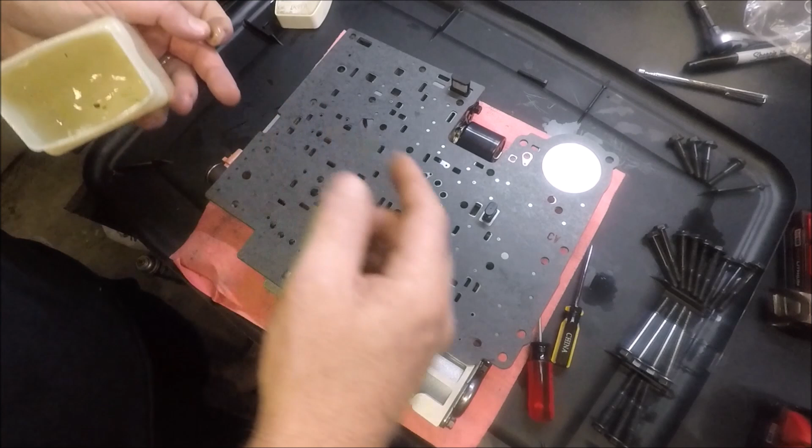Now, we do actually have one check ball that is going to go on top of the separator plate instead of underneath it. So we're going to take just a little dab of our Vaseline here, and we're going to put it right here where that check ball goes, and we're going to stick the check ball in there so it doesn't fall out. There we go. With that finished, we are about to go back under the car. Before we do, I want to make sure we have everything together.

So right here we have our 3-4 accumulator, which is this guy right here, and we have this yellow spring that's going to go into the accumulator. So we're going to take this spring, we're just going to set it in here. I'm actually going to lube this seal just a little bit with some Vaseline to hopefully make it slide up in the transmission a little easier. And with that being said, we're going back under the car.

Back under the car, we have our 3-4 accumulator piston and spring that we just assembled, and we're going to push them right back up into the bore, just like that.

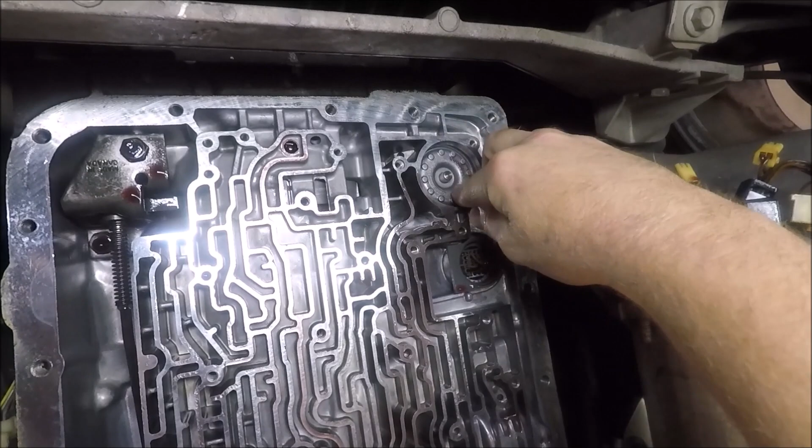She's working good. With that done, we're going to turn our attention to the pressure valve right here in the front of the transmission. You are going to need a pair of snap ring pliers to get this out, and I'm not sure how well I'm going to be able to hold the camera to show you guys this as I'm doing it. I apologize, I was not able to get a camera angle of me removing the snap ring. It was just pretty much impossible. I do have the wifey out here holding the camera though, so you can see the valve coming out.

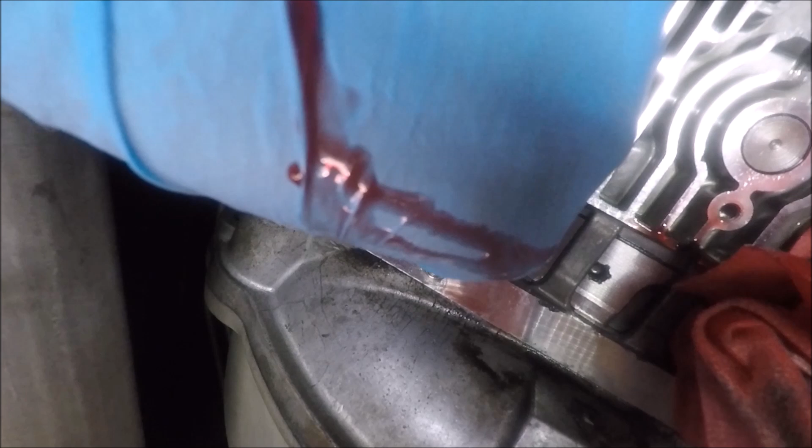So we pull the valve out, and there's a spring on the back of the valve, just like this. We're going to take a screwdriver, wiggle it up in there a little bit, and get the rest of this out. Oh, almost dropped it. Come on out. Yeah, and we can see we got this valve right here.

So back over here on the workbench, you can see the parts we just took out. Of course, this was all together. This guy was in here, this is in here, and this spring was in here. So that's what we just pulled out, guys. Now, as per the instructions, we are going to replace these parts. We're getting rid of this, and both these springs.

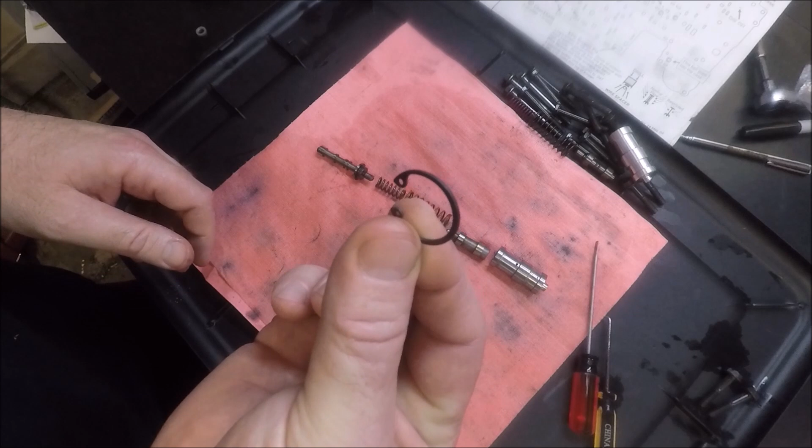We have our new boost valve assembly here. We have this new spring, and Trans-Go was even kind enough to give us a new snap ring. We also have this spacer. So here's how this goes, guys. This spacer goes over this. This goes in here. That's your boost valve assembly.

This original part goes back up in the transmission. Then this spring goes inside of this spring. On top of this, we put it all back in, hold it up with a screwdriver, and put the snap ring in. Now, once again, I'm probably not going to be able to get decent footage of me putting the snap ring in, and it's not because I'm hiding anything from you guys. It's because I'm going to be honest, I struggle with these snap rings. It does help to have a second person. You may need to have someone to hold this up with a screwdriver while you install the snap ring.

All right, guys, so like I said, we're going to use the screwdriver. I'm going to shove this guy up in here. Try to work it around. It's got a hole it's got to go into. It's way up in there, guys. I don't know if my fingers are small enough to do this. All right, yep. So that stayed.

What I'm going to try to do is go ahead and get my snap ring set on my snap ring pliers. Just like that. Like I said, guys, I'm probably going to have to fight with this snap ring for a while, so you might not see that because there might be 10 minutes of me cussing and trying to get this snap ring in. But we got our little spring inside our big spring. We're going to set that on top of our boost valve right here, just like that, and slide him up in there too.

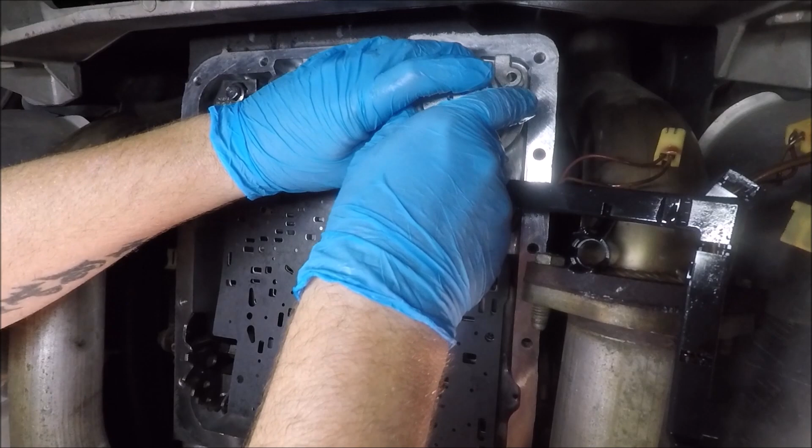Next, we're going to put our 1-2 accumulator on. So it's just going to go right up here. Going to thread a couple bolts in to get it started. We do have the stiffer spring in it, so it is going to give a little bit of resistance. Now I'm going to go around, tighten these bolts evenly, just rotating out. But I'm not going to final torque them yet, guys. We'll go over all the bolts and do a final torquing once everything is on here.

Next, we're going to put on our little plate, and we're going to be using these kind of short screws here. Well, other than the TCC solenoid screws, these are the shortest screws.

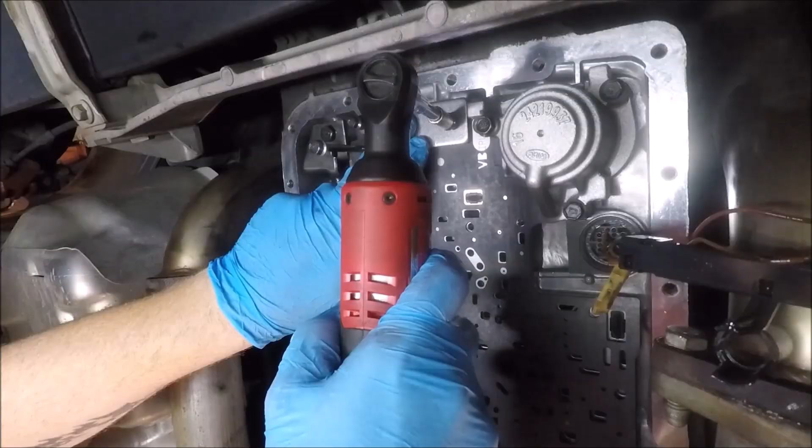Take out your bolts that you were using to align the gasket there, and take out your middle bolt. Now, I don't like how this gasket's kind of flopping here, so probably what I'm going to do is smear a little Vaseline on the back side of the plate here and stick the gasket to it to just kind of hold it while I set the valve body on.

Next thing going on is the valve body itself, and I just want to say this, on the instructions you have right here, it shows you all the different bolts, A bolts, B bolts, C bolts, D bolts, and this picture is actual size, guys. So you can come over here and compare the bolts.

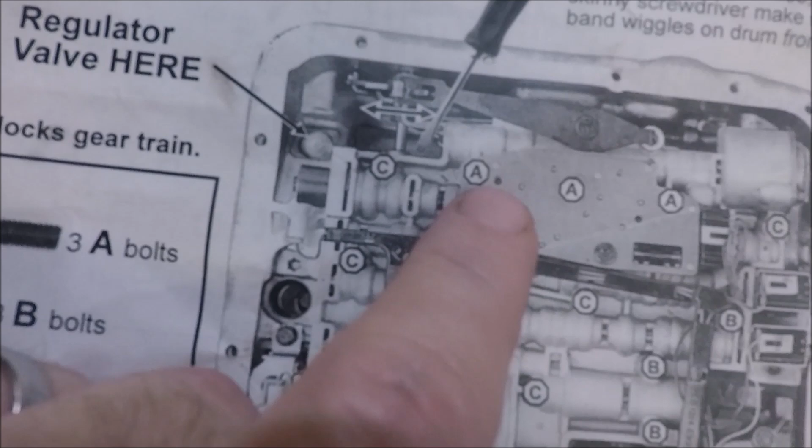So I'm not going to call them out when I'm doing it, but if you look in the instructions, it tells you you've got, over here you've got 3 A bolts, and that's this length. All 3 of them go here. It shows you where all the C bolts go. You've only got 2 D bolts. Those go down here, the side of the transmission.

So pretty easy stuff, guys. The main thing is, you're going to see in the video, you need to kind of move the valve body around, make sure you get everything lined up. Don't tighten anything down until all the bolts are in, because you don't want to risk crinkling your gasket or anything like that.

What we want to do, as we lift the valve body up, make sure we get our manual valve linkage in the valve body, and then just let it roll forward. Then we're just going to set the valve body up. And we're going to put a C bolt right here in the middle.

Then, to make sure our gasket stays lined up, we're going to put one of our longer A bolts right here, and one of our D bolts over here in the corner. Now you're going to put the remaining bolts in according to the diagram in your instructions. Now you can just snug all these up if you'd like, but if you're looking for a torque spec, guys, it's 8 foot-pounds for all these bolts.

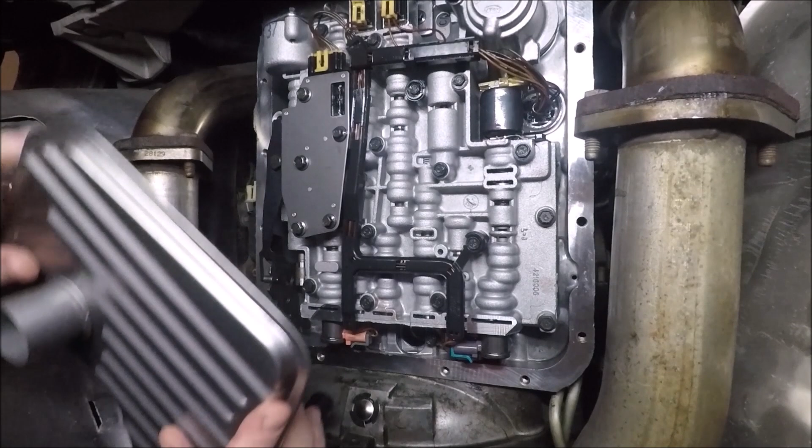Don't forget, over on this side we've got our detent spring for our gear selector. Can't forget to put that back in. One last thing, before we put the pan on, we need to put our filter on. Should be a nice snug fit. There we go. Pops right in. Got him lined up. Let's go prep our pan.

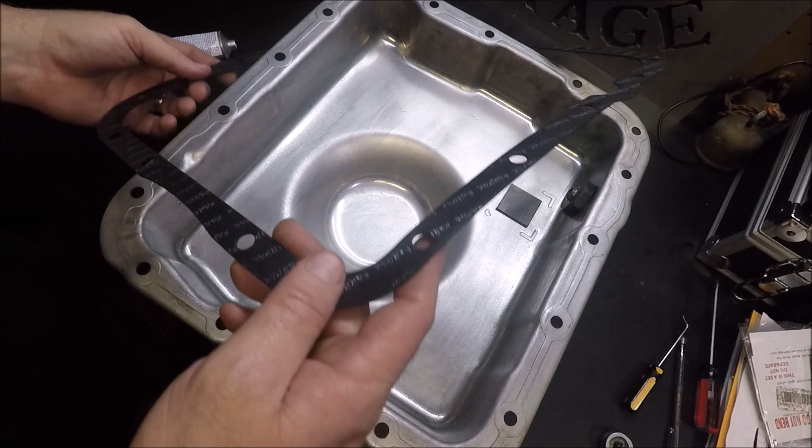As far as the pan gasket goes, this is kind of personal preference. A lot of people will just throw them on there dry. A lot of people will glob a shit ton of Permatex on there, and then they'll leak like crazy. Me personally, the way I like to do this is I just like to take the Permatex and not even really lay a bead. I like to just smear it, just a very, very thin layer, and it's more to hold the gasket in place than anything, but also to help seal possible leaks.

We're going to put our pan on. Our gasket is on top of our pan, already lined up. It is being held in place with some Permatex. So we should be able to just start our bolts. The holes are already there, we're not starting those.

So I'll just get kind of one in each corner here. Then we're going to put all 16 bolts in, and we're going to tighten those to 9 foot-pounds. Guys, I cannot stress this enough. Do not over tighten these bolts. The number one reason for leaks on an automatic transmission, people will over tighten these bolts. It will warp the flanges around the holes, and it'll start seeping oil or seeping transmission fluid.

So yes, 9 foot-pounds is the spec on this. That's I think 106 inch-pounds if you want to use a 1/4 inch drive torque wrench, but that's the specs. I'm gonna get it done. Okay guys, we're finally wrapping this up.

Now, if you're doing this on a truck, a van, a Camaro, some kind of other car, all you've got left to do is fill the transmission up with transmission fluid, start the car while it's still on jack stands, kind of go through all the gears, make sure the fluid's getting circulated throughout the valve body, and then take it for a test drive. Since I'm doing this particular installation on a Corvette, a C5 Corvette, I'm going to throw this last little step in there for all the C5 guys so they understand how to fill their transmission fluid.

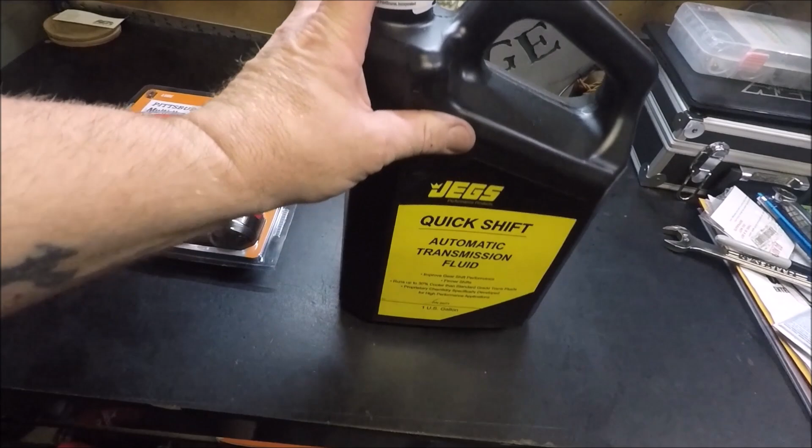Even when I put this in a bone stock transmission, it does seem to firm up the shifts. It also says runs up to 30% cooler than standard grade transmission fluids. I have not verified this, but judging from the change in shift feel that I usually get when I swap out to Quick Shift, it would not surprise me if it did cause the transmission to run cooler just due to less slippage. Now, the fill procedure on the C5 Corvette, like I just said, you're going to need some

transmission fluid, and you're going to need some sort of pump to pump the fluid into the vehicle. So just covering this as quickly as possible, guys, because this video is running extremely long. The fill plug that I showed you in the beginning of the video that we drained the transmission with, we are also going to fill it with. What you're going to want to do, you're going to want to get the car as level as possible. Pull this out. You're going to pump transmission fluid into the pan until it just starts to dribble out. That means it's even with the level of this hole, of the drain hole.

Once it gets to that level, you're going to start the car while it's still on jack stands, still level, and let it start circulating the fluid. As it is circulating the fluid, you're going to come under here with the vehicle still running, and you're going to continue to pump transmission fluid in, again, with the vehicle still running until it starts to dribble out the hole again. At that point, you're going to discontinue pumping the fluid in, you're going to screw your fill plug back in, and you're done.